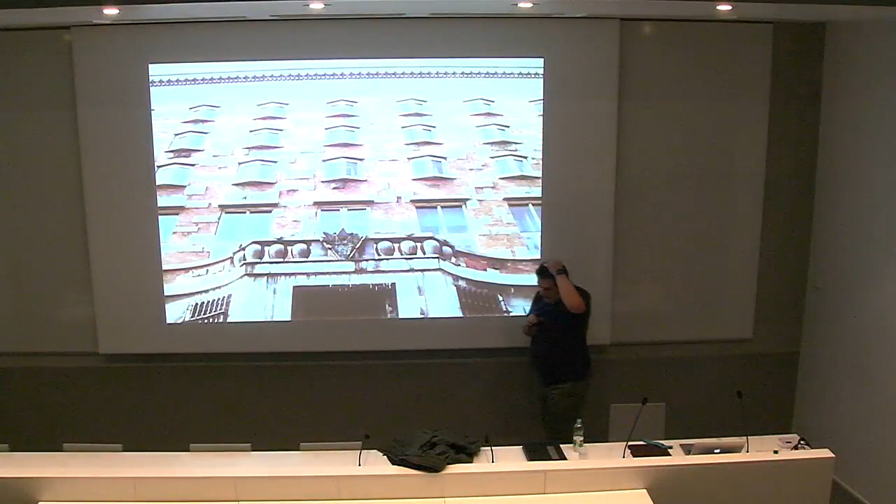What is specific to Slovenia is this one person, one architect embedded in the idea of Slovene culture—something maybe unique in Europe. The only other country being maybe Finland, because Alvar Aalto is very similar; he is part of the cultural physiognomy of Finland, if you want. This is Jože Plečnik. He was a student of Otto Wagner in Vienna and then went to work in Prague.

He did the Hradčany Castle renovation for the Czech president Masaryk, and then came back to Ljubljana and basically created the city that you see today, transforming it from a medieval provincial town into the spectacular little city along the river you see now. He did a lot of urban replanning, but this is also one of his most famous buildings: the National and University Library of Ljubljana, to which we are now doing an extension. This is the most famous building of Slovenia, in a way.

What is so interesting about this guy is that this is not very old—the beginning of the 20th century, just before Corbusier starts doing things like Pessac. He is trying to merge the languages of Europe, from Northern Europe to Byzantine influences to Knossos from Greece, into one singular language. It might look odd to you as young architects that I'm showing this strange, archaic-looking building, but I think this ability to understand and digest all these different cultures into one is fascinating, even though our buildings don't look like this.

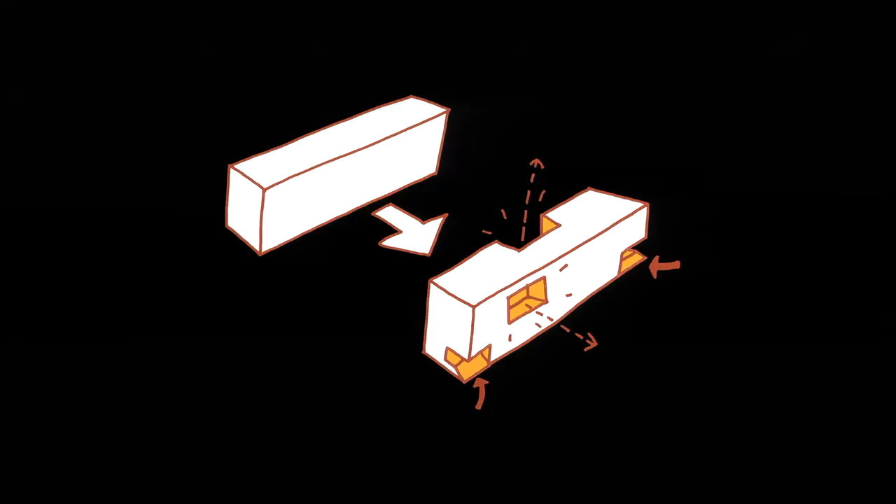Why do I show this project, which is already quite old? All the spaces are built into the building. You see it over there, open air, and over here. Already in those blocks, which were very modest in means and built for extremely small amounts of money, we were trying to express the possibility of an individual habitation within a collective form. This was incredibly important, especially for social housing within these massive blocks, to have the possibility of recognizing your own unit.

We did it also in other projects. This is something that some of you have visited, so I show it very shortly. I don't know, Dominic has seen it. This is student housing that we did for the University of Ljubljana, for the school where I teach, but not for students of architecture. It can be for everybody.

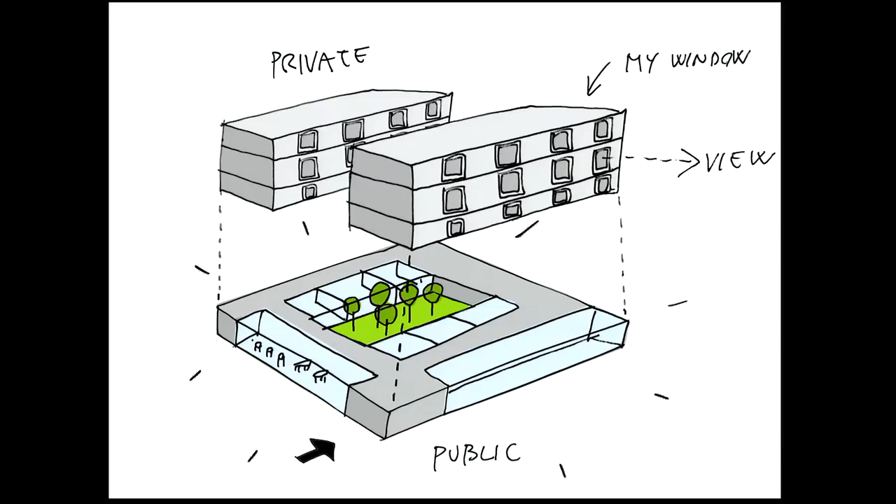It was a bit of an anomalous project, because it was the left-wing government going out and wanting the votes of the students. So we won the competition. We had to build it extremely quickly, and had to simplify the project to a point where we separated it into two pieces: a plateau of public programs, and slabs on top with the student rooms, where we tried to convince the university that student housing is somebody's home for 4 or 5 years of their life.

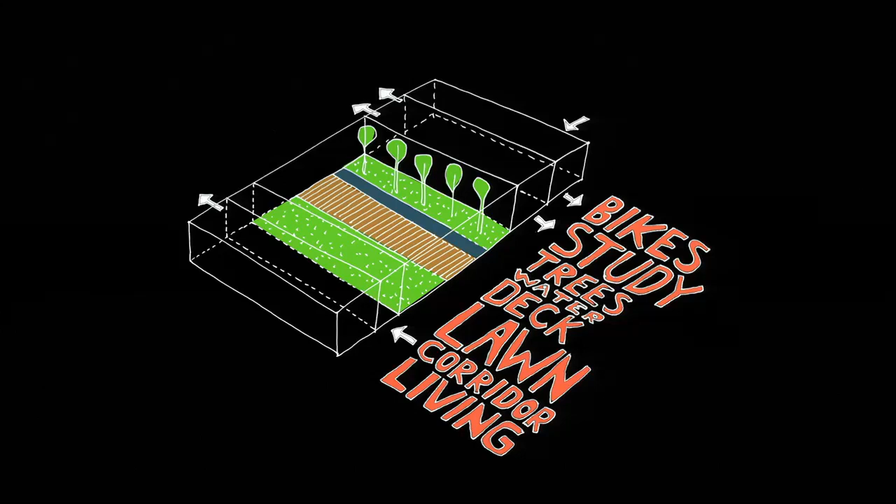So it's not really a room that you inhabit, but a kind of someone's home which consists of this very large public space on the ground floor, where there are all glass walls that don't separate the programs by hierarchy, because the bicycles are exactly next to the study spaces, only separated by glass facade. So it's a kind of big public area.

And then we also tried to convince the client, as a second thing, that the 4 slabs of apartments should all be the same. There are no apartments for invalids, no apartments for families with 2 children, no apartments for single people. This should be only one apartment type which can work in all of these options, because there should be a kind of open model of habitation.

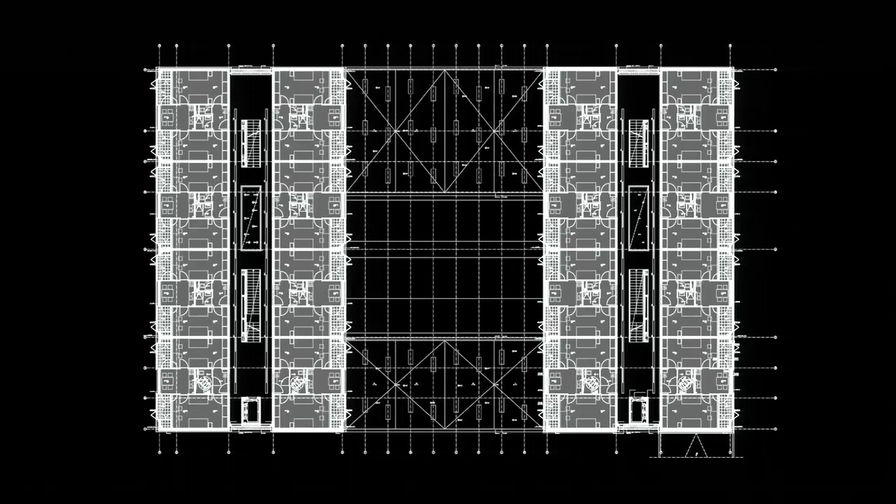For example, this drawing shows that each of these units, which is 1 room or 2 room with prefab bathroom, kitchen in the middle, and a dining room that they share, no corridors, is shown here in a 4-person configuration, but it exists in all the other configurations I just mentioned. So it's one singular unit fit for everybody.

Of course, it helped with the production, because we had to build this in a super short amount of time. It also helped us with articulation. Each of these units only has 1 window that you see on the street, and this is the public face of the unit. This is what you recognize as your home for 5 years studying at the university, and the rest is private terraces which are screened by folding screens.

The fact that this is the center of the unit - I have much more explicit photographs of this, because these were sent by my students who were taking pictures - also shows, in fact, what we tried to do. We tried to express this minimum of individuality of the unit on the facade of the building itself, while preserving a lot of the spaces for the private parts of the unit.

We also worked on projects like this. This looks like Berlin in 1980, but it's in fact Ljubljana in 1980. We inherited an old urban plan, which, when we went to visit it, is also social housing. Social housing, as you know, is super regulated - you have to have an enormous amount of children to qualify, and you have to be unemployed, and so on. So basically these units are very small.

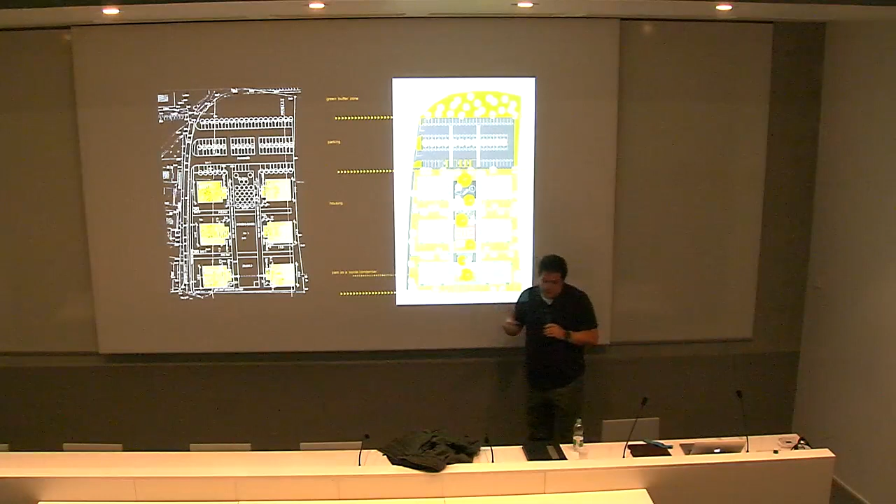We were supposed to work with this fixed urban plan, so the whole project becomes a transformation of the urban plan, in fact a fight against it. When we went to see the site, we were shocked to see these are the first 6 buildings of the city of Ljubljana. If you come by train from Zagreb, this is the first image of Ljubljana you see - it looks very urban, but in fact it's total suburbia. So these 6 buildings became like sentinels that guard the city of Ljubljana.

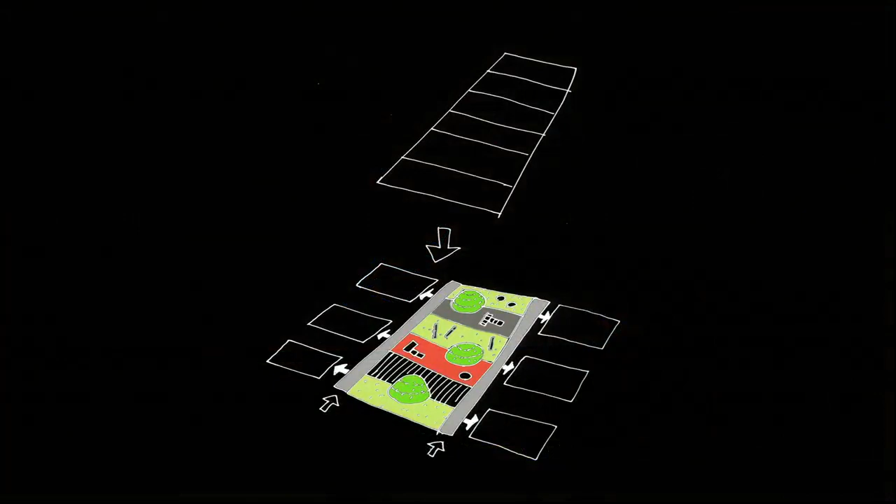Around the central area, which is the common living room, where all the people basically chuck out their children from the apartments, the articulation of this space becomes extremely important. It's not really a landscape—we never saw it as a landscape.

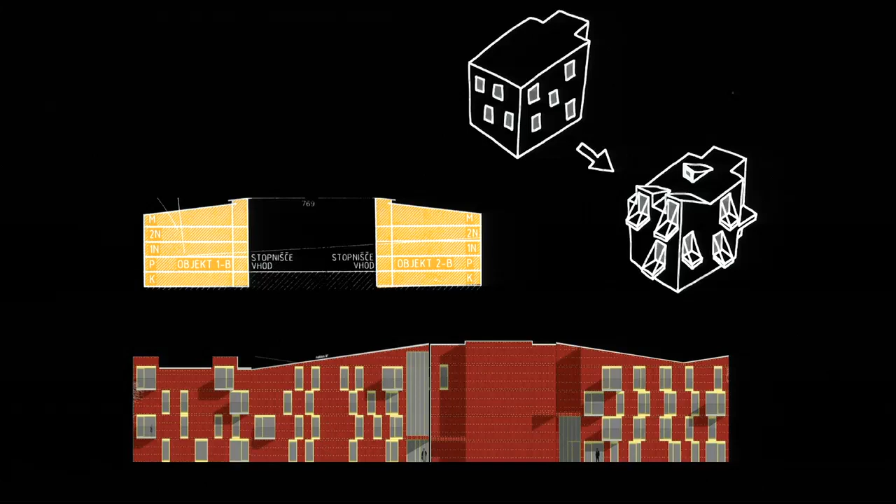We saw it as a kind of plateau where all of the generations can overlap, using green elements more like building blocks that separate the teenager playground from the small kids. Then the idea was to transform the houses from what the urban plan said—a very formal expression—into something that appears different from all sides, so every time you look at the building it has a different kind of appearance.

And pushing out the balconies, because these units are so small that the balcony takes the form of a kind of suspended garden. The image you see of the buildings—everybody asks us about this, and everybody is actually horrified. People don't like these buildings.

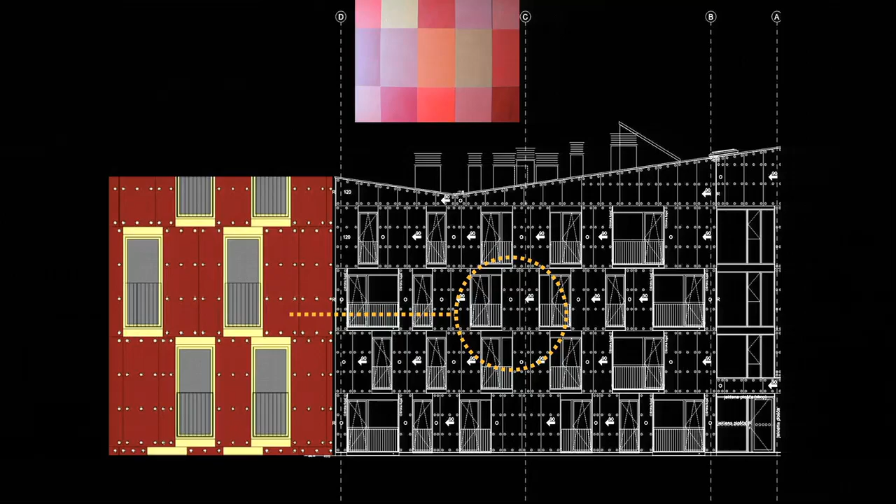This comes from the fact that we use the productive size of the panel to cover the facades, always cutting the last panel. And because architects always try to make things perfect—ideally you'd make this into a wonderful panel where you wouldn't see anything—we actually enlarged the screws, so what you see, these white dots, are in fact the underlayers of the screws, visible from 5 kilometers away.

So the first thing you see about these buildings is this strange form that denies being a house, and also this enormous amount of dots that show the most minuscule element of the building—that's the first thing you see.

This is that housing, and afterwards we won a project for the second part of that housing, where we tried again to experiment with construction. We actually think the relation between the unit and construction is extremely important. Here we constructed the buildings out of concrete, like shelves, without insulation.

Then we inserted wooden constructions into the building—so basically what you see here are the wooden constructions, built like small sheds in the garden, inserted into very large concrete structures. So the building is a kind of shelf full of individual apartments, meaning each apartment is also physically insulated from the next door apartment. In a sense there's this feeling, at least for us as architects, of individuality of the unit.

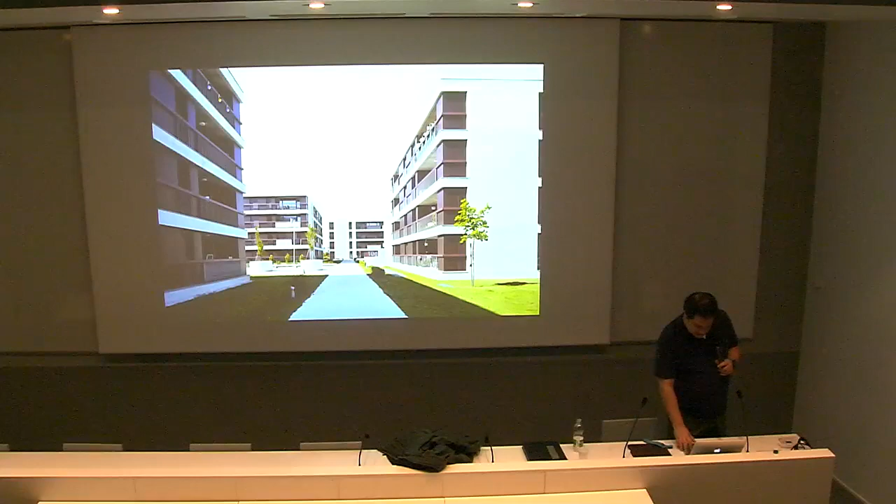Then last year we won the in-between space, so we became our own context—we are building in between two of our projects. We did a kind of joke, a typology that is in between the two, one in between the city block and the villa block we had before.

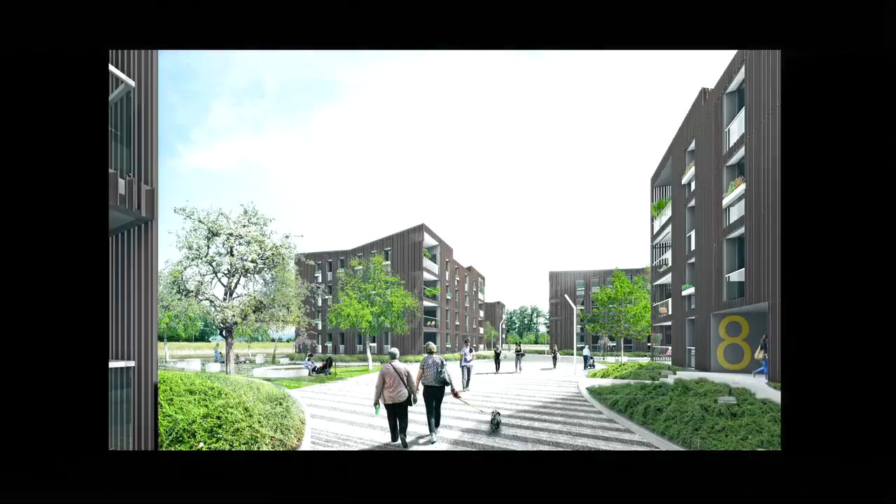It's actually under construction now—it looks like it's in between the two, and it's exactly 50% of the color of one and the other that come together. So it's literally a merger of our two projects, but done in something that looks like wood, though it's in fact a kind of extruded aluminum facade we are just doing now.

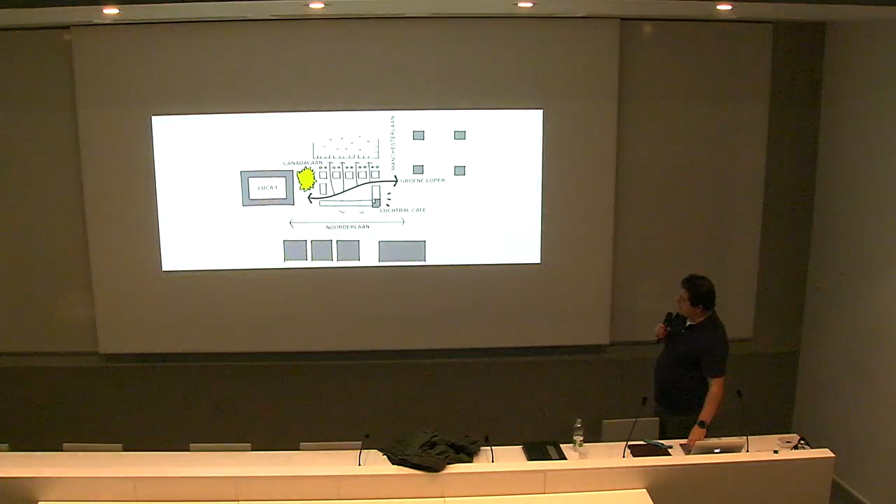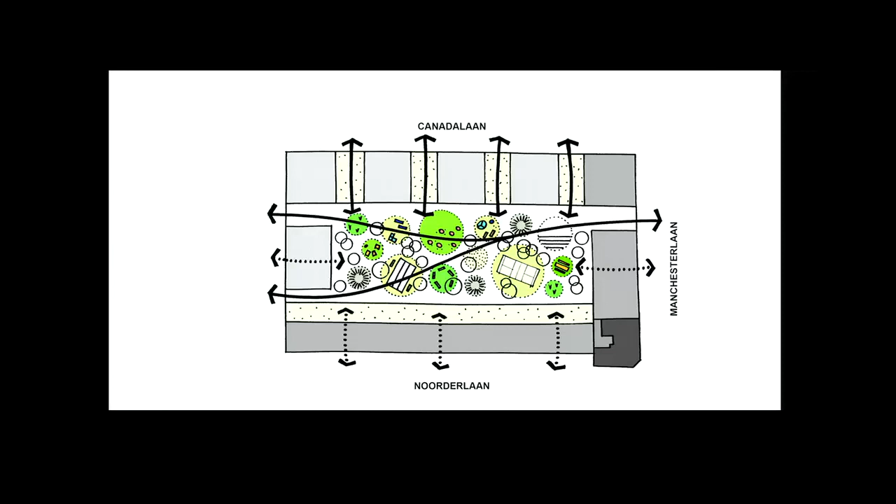As Dominic said, we have an office in Antwerp, and we are doing a transformation of a city block where only one building remains, in the port of Antwerp, also for social housing. Following the idea of the robust structures of the buildings in the port, we create a structure that can be filled in with maybe 50 different typologies of apartments, giving one singular image towards the outside—so it's a kind of urban transformation.

So why do I show you this collective housing? We don't do only social housing—if you go to our website you will see quite a lot of it, but we also did some commercial housing as well.

This is one of the commercial housing projects that, in our opinion, summarizes very well the relations we always try to capture between the program, the relation to the city, the structure, and the feeling of individuality within the collective form.

We were supposed to demolish that building. What we propose is to create something that fits perfectly with the urban designers' rules. It touches all the edges the city requires us to touch, but is in fact lifted in the air. We joked that it tries to bring the frivolity of Brazil into a Swiss condition.

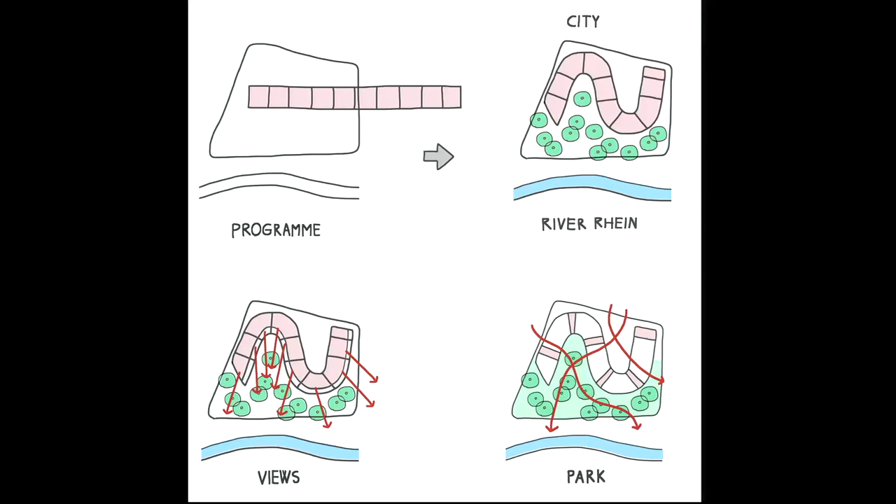Of course, the young people need more bedrooms, so their apartments are stretched in this way, so they have more bedrooms and can have children. The old people want lavish living rooms, which cost 1 million Swiss francs, and have very little bedroom space. So in a sense, a form that works at the same time as a programmatic distribution.

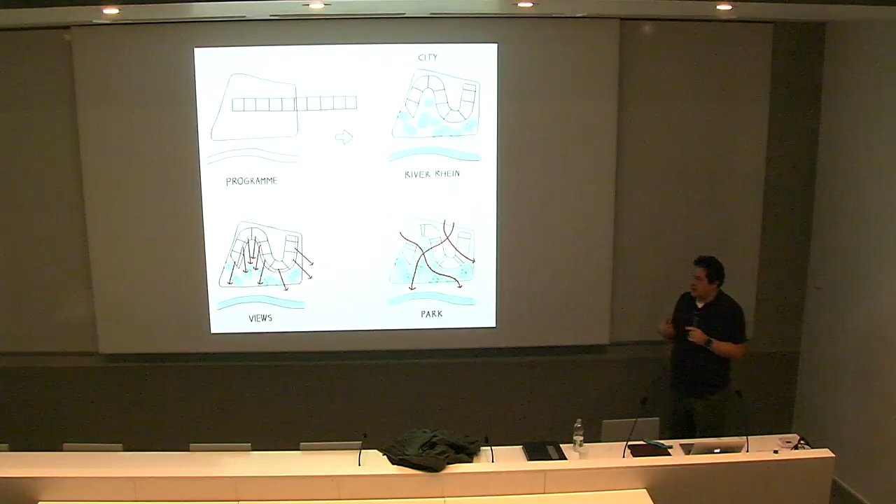It looks very frivolous, but in a sense it has a logic. It's lifted up in the air on these 4 columns, 6 columns in fact, open underneath.

It looks something like this: continuous terraces that surround the building on all sides, at different widths. If you look at it from the Rhine, it comes out twice along the river, creating dynamics that already exist there—it doesn't make a city block along the river.

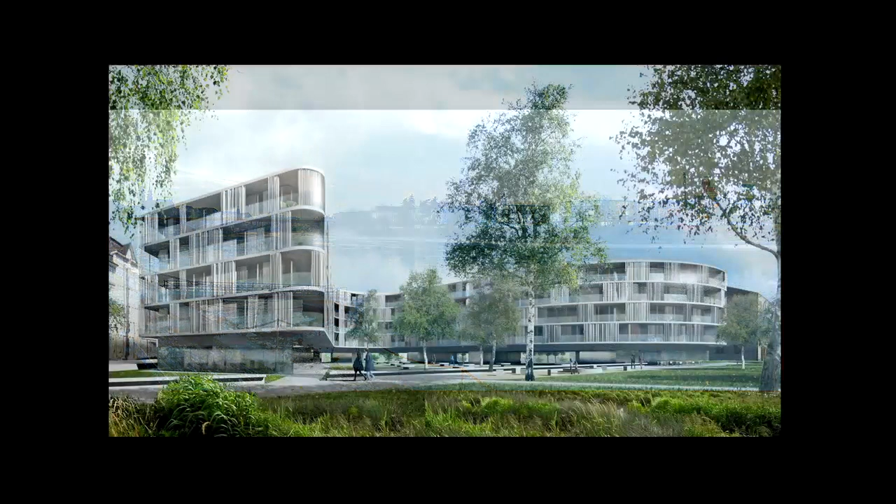If you look at it from the ground floor, you have this continuous ground floor which goes completely underneath the building, and then these kind of metallic terraces that block the views of the private units. How does it really work?

It's a singular structural system. These are the columns, the cores. There's another concrete beam, and a series of thin steel columns which support the facade and also create this one singular beam that curves around and creates the building itself.

So this is the columns, this is the ground floor, and then the building floating above it, and these old trees which are preserved and basically extend all the way underneath the building.

As I said, old people have less bedrooms and a lot of living room space, younger families have it a different way, but everybody has the view of the water.

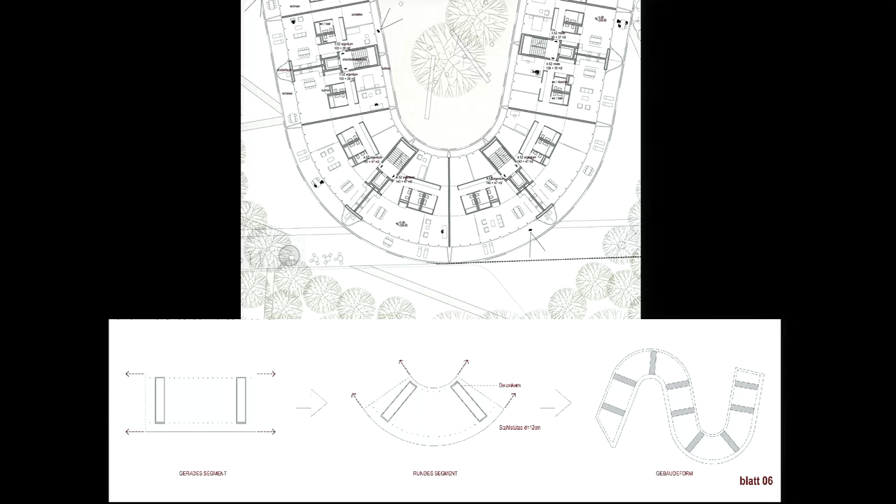So in that sense, the structural model and the way things work—maybe this is why I wanted to show this project, because it illustrates very well how all of the elements of the building should work together.

The glass facade of the building is also curving in and out, and on this part it becomes mirrored. It also separates private terraces, but also serves as storage for each individual unit.

So in a sense, even the units that are completely at the back will have this kind of fantastic view of the river.

Of course, this means we don't only work on super cheap housing. This housing is unbelievably expensive, but the thought process, I think, is not so different. It's maybe the amount of money you can spend that changes, but the way you construct it is not different.

We have also done, more as a sport of the office, a lot of small houses, as Dominic was mentioning in the beginning, and we use them more as test grounds for different ideas that might appear in other projects.

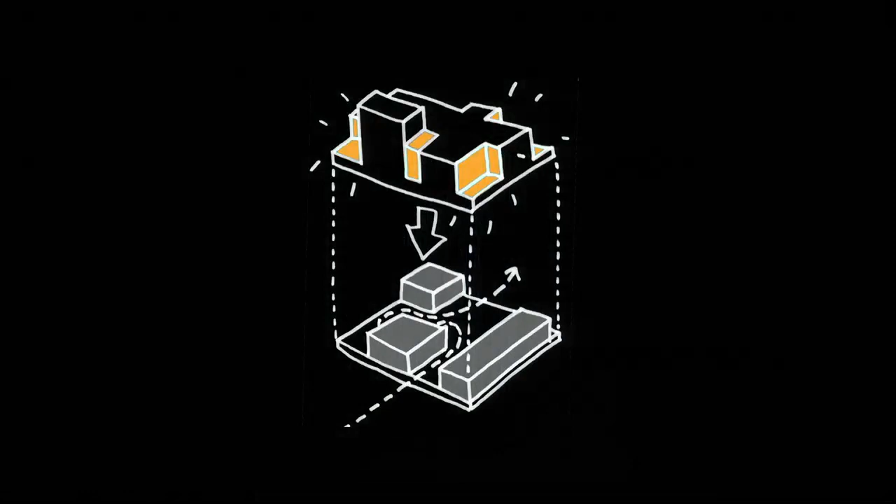One of the first houses that we did, apart from the SB house that Dominic was mentioning, was a residence for a Dutch ambassador in Ljubljana, which was a very prestigious commission, but not a very big one. The building is organized around the fact that embassy residences have a public part, which the ambassador uses for parties, but also a private apartment for the family. This duality that the house has to function on both levels is something we used to construct the building.

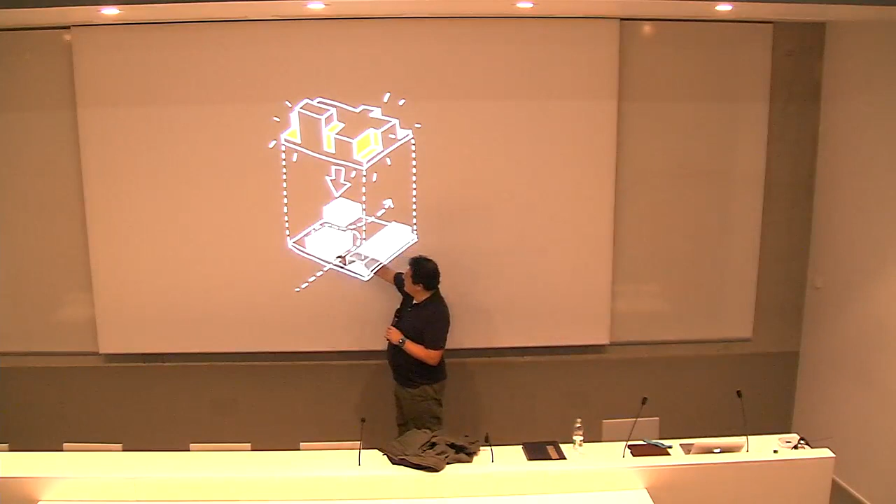This is the kitchen, toilets, and this kind of stuff. This is the office of the ambassador, and this is the small salon, the cigar room. These three programs are three concrete volumes that support the wooden construction above, which is the actual private house of the ambassador. So the house looks like this on the outside, but it's a combination of two structural systems that come together to unify and describe the program of the building.

We have also done a lot of small interventions, like this funny little pavilion, which is like a rock thrown into a garden, actually made like a rock because it's hand-polished white concrete. This is also a good thing about Slovenia, is that you can still find laborers who work very cheaply, so we could have people sanding the building for two months by hand.

But this is one of those constructions which is not really a house. For us, it's more like a device, more like a camera. If you look at it from the interior, it's more a device to enjoy the garden. So we never really saw this project as a house, but more as a kind of play with the space of the house to frame the garden.

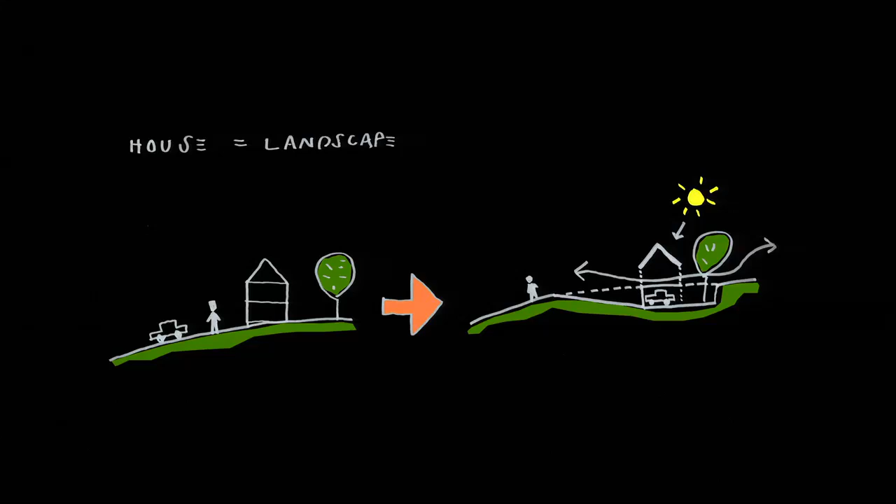The dialogue that houses always have with the landscape is also an important thing, and maybe this project illustrates a possibility to subvert and include the landscape. This is a very young family, and we convinced them—they have a house on top of a hill—to dig the hill, making a huge earthwork to hide 50% of the program into a kind of patio condition, and then to have only this tent dominating the landscape.

So the house, in a way, is like a little steel tent. Well, not so little; it's 25 meters long, but it basically sits in the landscape. It has the traditional form because this is required by the local authorities. But also the idea that the house has to have this form, then even the two construction models: the patio house, which is hidden and all in concrete, and then a little steel house on top.

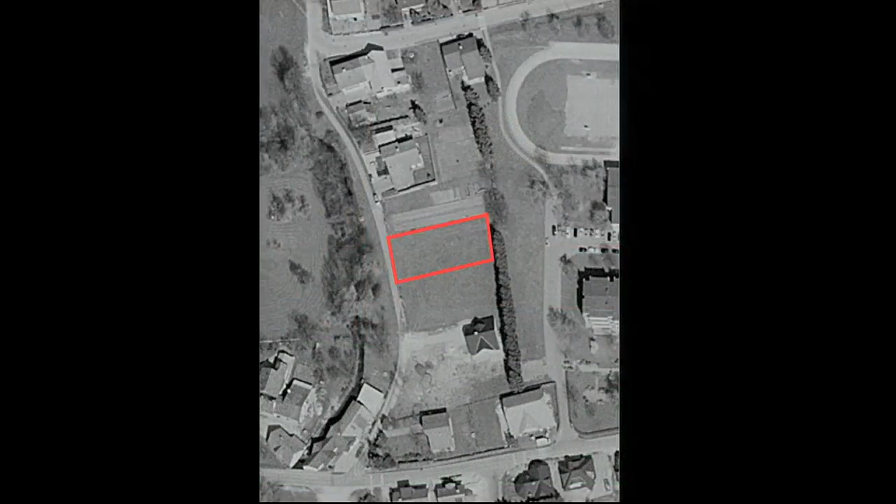Sometimes when you work on projects, you have nothing to work with. This is one of these examples. You come to a location and there is nothing there. No, there is nothing, you can't say anything about it. It's just a piece of ground, a piece of earth without any references. So this is Ljubljana, Slovenia, one of these sprawls where we were supposed to build a house for a family with four children.

And maybe these four children become the theme of the house. This is a couple that got four kids after being together for 20 years. And of course, it's the miracle of science, not a miracle of... well, the Pope was visiting Strasbourg today, but he didn't help in this case.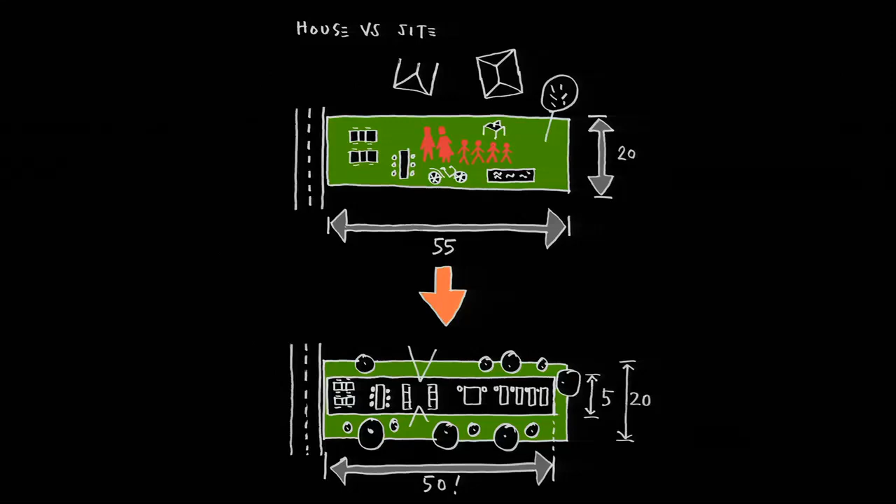So maybe this becomes the project, the actual context of this house. We create a house where these two people can live with their four little daughters together, but also separately at some point. So we imagine a non-place, like the habitable supermarkets of Andrea Branzi from the 1960s or 70s, as a place where you could enjoy living with your family.

Of course, the neighbors accused us of doing a gas station, and then a car showroom. But in fact, it's a single building, 50 meters long, where there are no rooms. It's basically one room with four little boxes, one for each daughter to separate, and then a series of walls that come out. When the daughters become teenagers and want to be separate, this will allow them to separate their rooms. But for now, the mother can actually live with her four kids the whole day.

The weekend house typology is a very stupid one, because it's some sort of total waste of space. These are buildings that are occupied for 48 hours a week, at best, so they're basically piles of building material standing around.

So we did this one in a kind of protected area in a national park, to replace an old structure that existed here. We made a building that would look more like an object thrown into the landscape, which only on Friday evening would become a house.

On Friday evening it could explode and become a building, serving the purpose of a house for two days. It would also include all the outside spaces. We try not to really touch the ground, so all the outside spaces of the house are included, because on Sunday evening when you leave, the landscape would remain unspoiled.

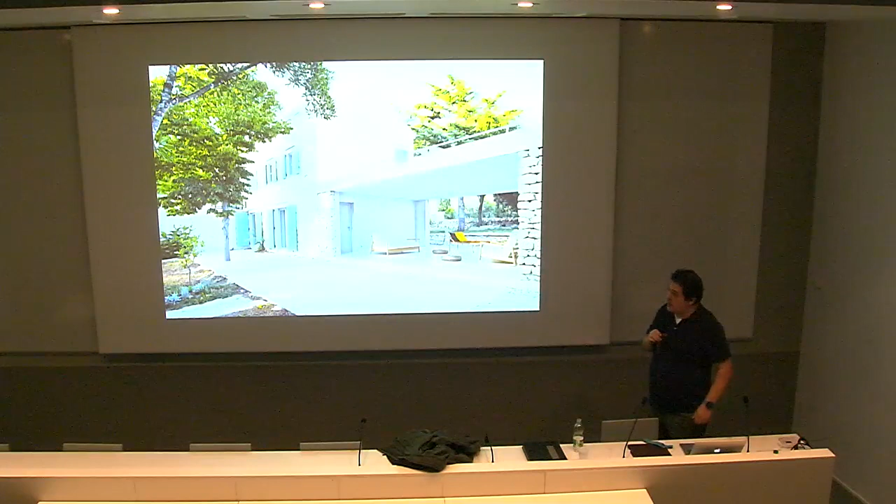Here the complete construction is in white concrete, again hand polished. Then we place drywall against this construction, like the kind used for separating walls, because these houses were built solid out of stone, and the walls around them are this kind of drywall. We actually combine two models of construction, one for the ephemeral, together with the one for the real building.

So the old building we renovated, and this new one, the kind of open-air living space, we constructed with some spaces. This is where I sleep when I visit in the summer. This is a guest bedroom, but it also has a facade which completely slides away, so you can actually sleep completely outside. So, the stupidity of an architect...

This is what we thought was going to be the fantastic area to sunbathe in summer. It's actually 60 degrees here, so nobody ever sat on this fantastic terrace that we designed. As architects, we are also very, very stubborn, but also very, very stupid, very often.

Sometimes houses exist in kind of imaginary pairs. This is a house which has its pair. We had to demolish half of a double house and build it again, but it became a kind of ghost, a white ghost.

At the same time, we had to do exactly the same thing in Ljubljana. This was Zagreb, this is Ljubljana, two cities 150 kilometers apart. We create a kind of artificial dialogue in the office between these two buildings, the double house that we demolished, again made out of steel, in dialogue with the neighbor but also with the other house, 150 kilometers away. So we are the link for the project.

For a young family in Prague, we are just finishing this house. Prague suburbia, there's nothing, again one of those no-places. A teacher of mine used to say, when you go there, there's no there. So it's kind of nothing, you know.

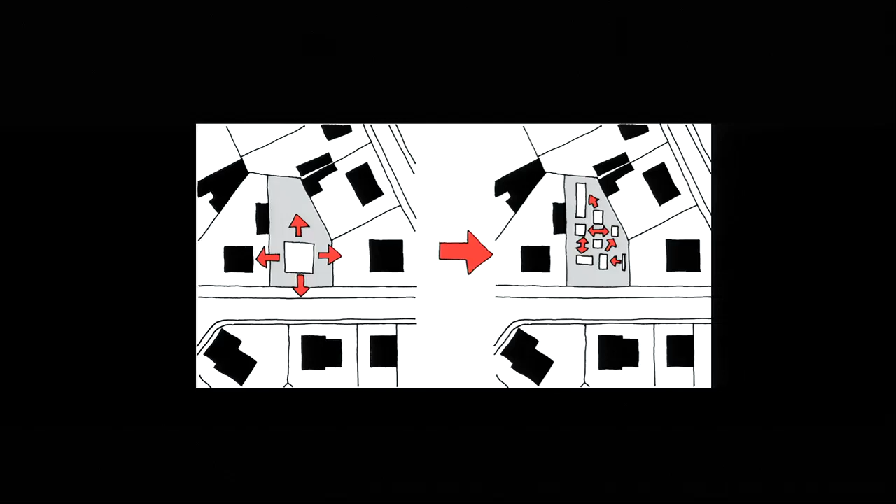Basically, the house has to create its own urban conditions, so the house becomes a small village. Every space of the house, for a very young family with zero money, is in fact a separate little house. We tried to create it so all of these spaces can be constructed by themselves, because the budget is so low. It's a simple wooden construction where we more or less instructed them how to build it. A Belgian guy in our office worked with them and explained it, and now they're basically weekend builders with all of their family and friends, finishing the house.

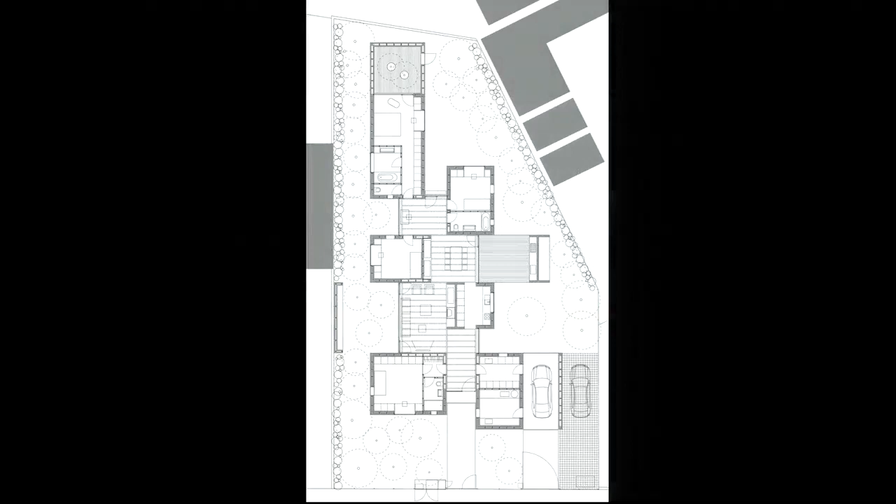The house is then something like this. The living room is the only one, about 160 square meters. It's also the main circulation of the house, and all the other rooms are just separate little boxes. The boxes are connected by the same construction, and the living room is the one that remains in natural wood, while all the other wood is this pre-patinated gray wood.

So that's a quick overview, but I'll also show one project in the city of Ljubljana that we designed for friends of ours who asked us to demolish their house. It's a very expensive neighborhood, even though it doesn't look like it, because all of the embassies have moved here. We demolished this house a few years back. These were friends of ours who asked us to design what they called a small house. They have no children, so they said: one bedroom, one living room.

We said, fantastic, finally somebody who doesn't have huge ambitions. But then next time they told us, yes, but we want a swimming pool, and we want a gym, and we want a music room, and we want this and that. So finally it became a huge house. So the question became: how do you make a huge house feel small?

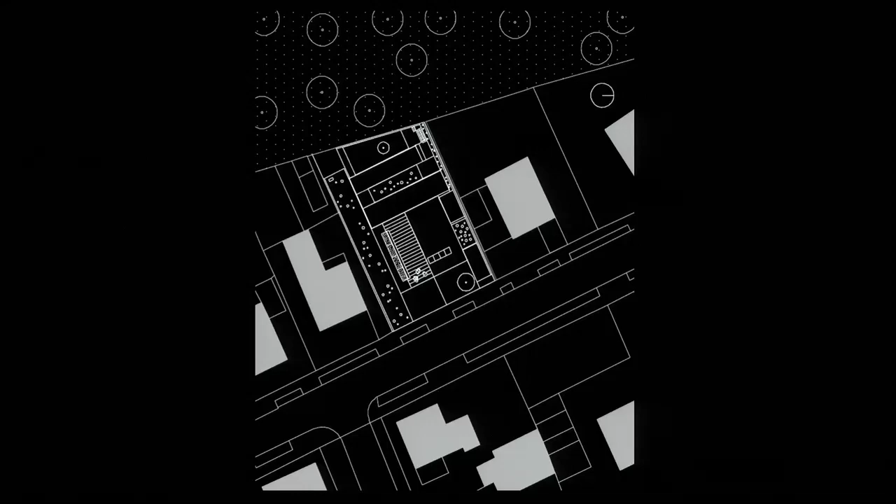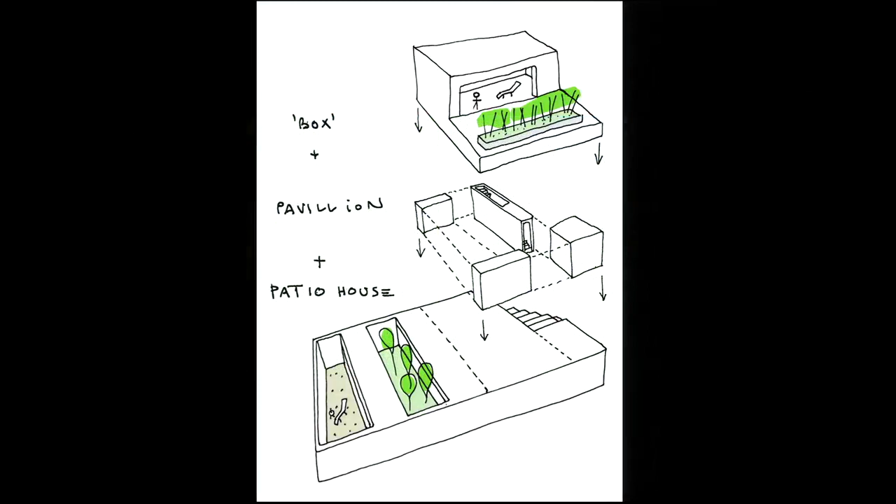What this location has next to it is a kind of very large natural biotope, protected by the city because of some parasites that live there. So we said, okay, maybe this can be their garden, because obviously the program is going to completely fill the site. So this is their garden, this is what they look at, not what they actually walk in. The house basically covers the entire plot with some patios in it, and we have two different typologies standing one on top of the other.

If you look at the plan of the building, it actually looks like some sort of landscape configuration. If you come to this street, the building has no fences, because all of this greenery is its fence. It has this very special configuration. It's constructed completely out of concrete, like out of concrete, rough concrete. It looks very perfect in this picture, but it's relatively simple concrete, not specially finished. It's turned inside out, like a glove.

There's apparently no communication towards the street, because this is the only light you actually see when it's on. It's a bit of a Plečnik motif, because he always has this motif of entering the building as a very important part of the building itself. Once you enter, you actually see the garden — you don't see the living room, but you see across and you see the garden.

I'm not going to go into the structural model of the building, but it's actually standing on very few elements. Then you go out towards the terrace. The good thing about old buildings is that you have these super thick walls, which we cannot make anymore, so you get this transition space — when you go out, you have a distance to walk before you're actually outside. Today's buildings don't have that thickness, so we wanted the same feeling here, and we created these very deep wooden windows where you can actually jump out of the building.

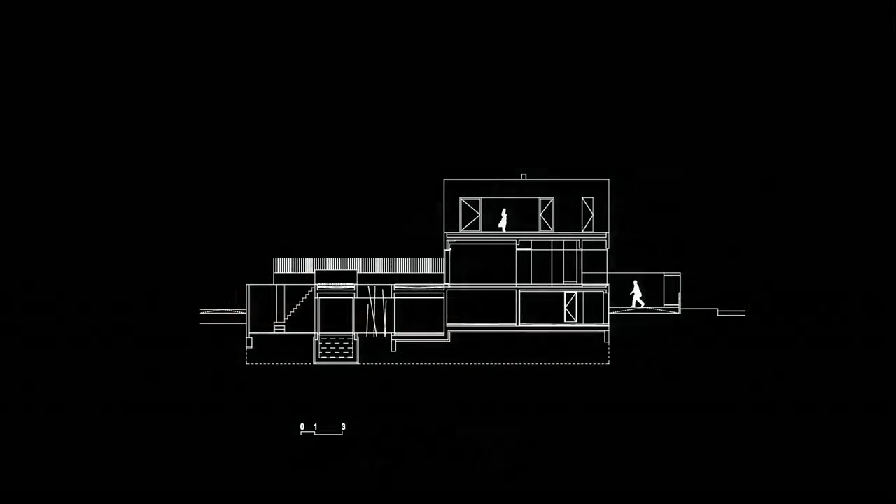So this was somehow the idea that the building should be so unique, so unitary, so just one construction. This is the complete section through the building, where you see the basement, which is completely filled with programs.

So you go to the basement, this is the first patio, which we call the beach. The second space is the swimming pool in between two sheets of glass which slide down, so you can swim in the summer. Then you have the workspace and a kind of gym space, and a series of other spaces in the building.

On top, just a box with the bedroom, which is oriented towards the east, so it catches the eastern sun. Once you go out of your bedroom, you are again faced with the garden. So this is in fact the garden. Well, this is not what they own, but this is what they have as a garden.

So as I said, this transition point, this ability - well, this is a good thing about small houses. They give you this ability to rethink particular elements of the building, and maybe allow you to try things that you can never try with larger projects.

Finally, I would like to show this image as our idea of the collective. This is a wallpaper again in my house. So you look at it and it looks like this - a fuzzy pink, pinkish surface.

If you come very near, it's actually 4 millimeter wide faces of, well, maybe 35,000 Korean people who are all schoolmates of, or the generation of, this Korean artist who painted it. So what you see as a kind of fuzzy cloud in fact consists of very particular human faces. Sometimes as architects we have to play between these two scales - the collective that you don't see, consisting of millions of very individual human beings with very specific wishes, and some of our buildings also work on that level.

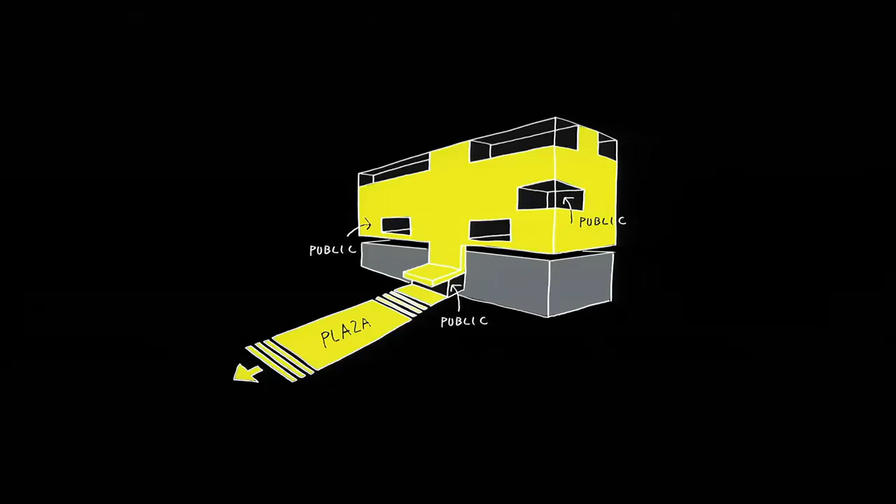This is the first of the public buildings I'm going to flip through, the School of Mathematics, which we had to build some years ago on top of another building, not owned by the university at all. So we basically had to build a public building on top of an already existing one. What we did is try to create all of these spaces, the aulas of the school and so on, to have a very direct communication with the city.

And these are these open windows. All the rest is completely hidden in a kind of screen of fuzzy programs. All of these prints are different on the glass, and they're all on the exterior. So, in a way, each of these prints is defined by the amount of light that each of the rooms behind can take in.

We did this project for the University of Antwerp, the central building for all the lecture halls in a very green campus, where we tried to include the series of old trees that existed on our site as a facade of the building.

So of course the main building has to be a circle, but we don't have enough program for a circle, so it's a square with a kind of slice of a watermelon. And the slice of watermelon is a lecture hall. The building also looks like a slice of watermelon because it is literally sliced, so you see the section of the building coming out towards the square.

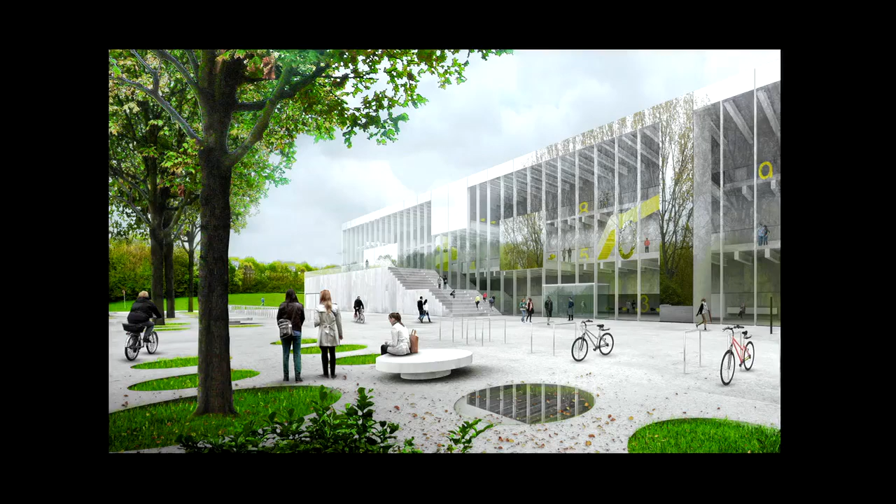And this section of the building is very industrial, very rough. It just connects all the classroom spaces into one, while on the back it is really literally closed, and all of these balconies are in fact escape routes or the smoking areas of the school.

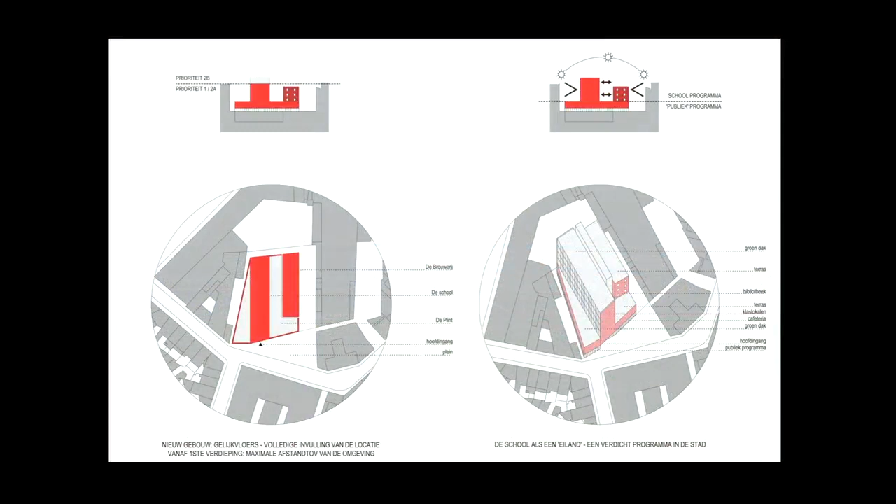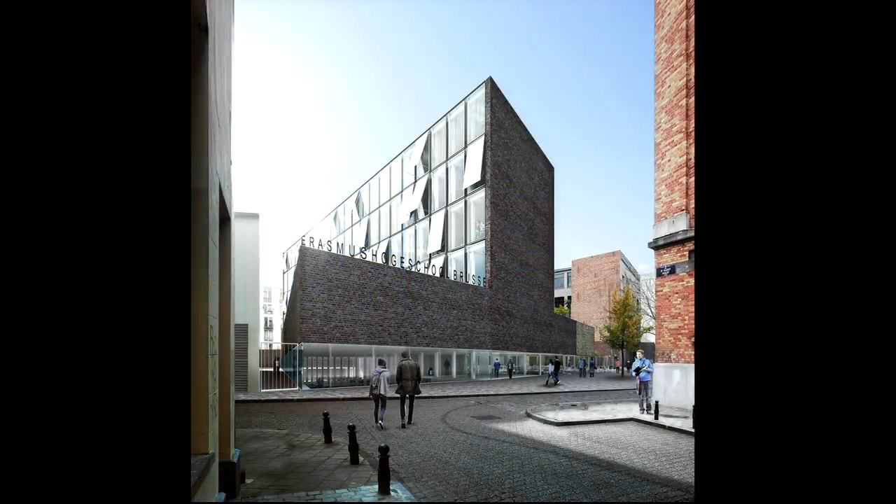So this complete neighborhood, which is very dense, a very mixed neighborhood now being gentrified, but where a lot of Moroccan families still live, will somehow become part of the ground floor of the school. This is not our project - this is Martin Creed, a British artist who is working on the public art for the school.

And of course, the complete compression of the buildings inside this neighborhood, with also the open spaces of the school included in the volume of the school, etc. You will have to see it.

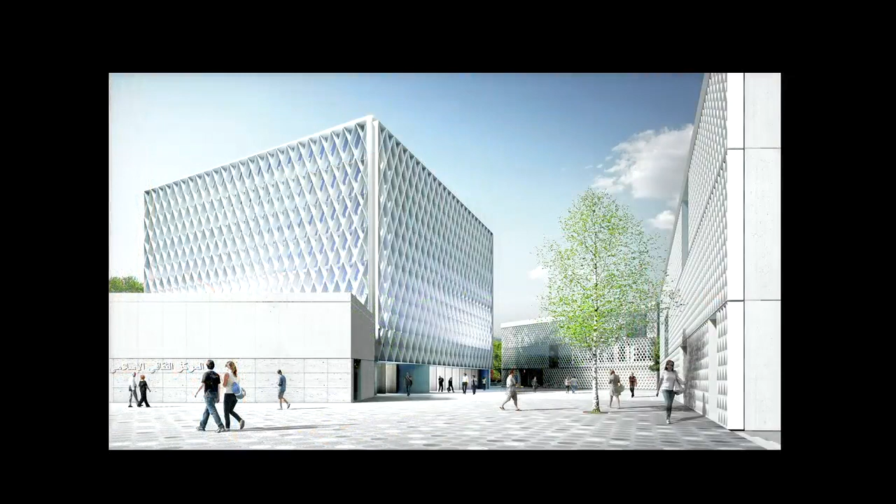We are now also constructing the first and only mosque in Slovenia, in Ljubljana. It's a completely Islamic center which we are just now building. For us, the idea of a mosque was that this is a completely exterior construction. I'm not going to tell you very much because you're going to see it pretty soon, and it looks better in reality, but this was our inspiration.

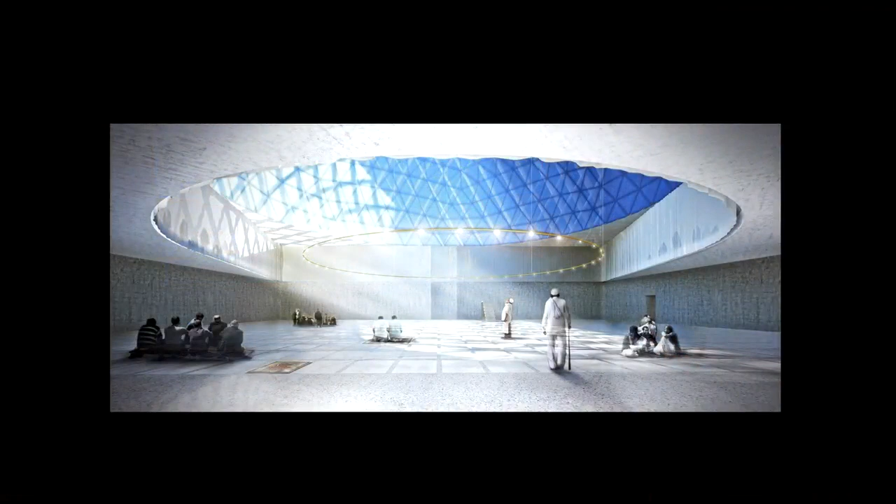We tried to explain to the clients that religion is something completely weightless, and it shouldn't really be a building. So the symbol of the religion is this 15th century Persian miniature, the Iranian soldiers going across the Asian territories with tents as mosques. Because the Islamic community of Slovenia is of course also a migrant community, we didn't see them as warriors, but as people who actually carry their religion with themselves and that doesn't have so much material.

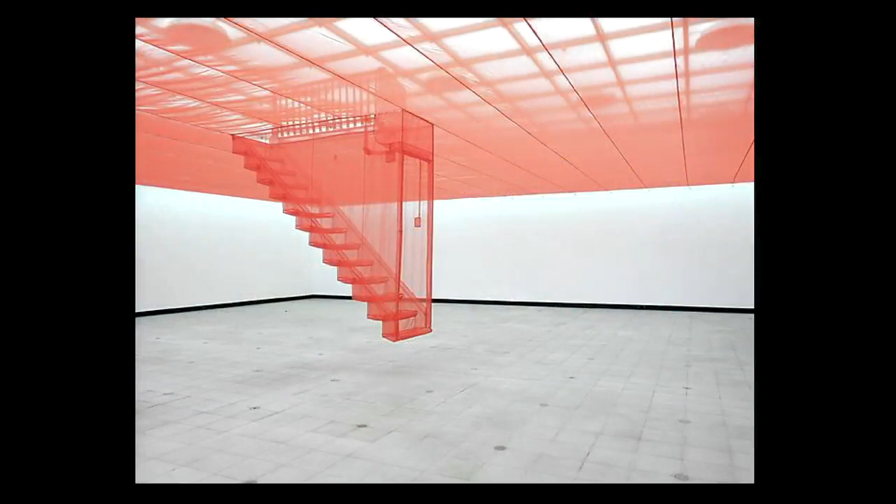So these public buildings, of course, have this ability to tell stories in a way.

Nothing happens out of nothing. We are always working with the things that existed before us and are going to exist after us. So he's kind of interpreting this, but of course adding his own specificities. The definition, the relation between the structure and the program in Plečnik's buildings is extremely important.

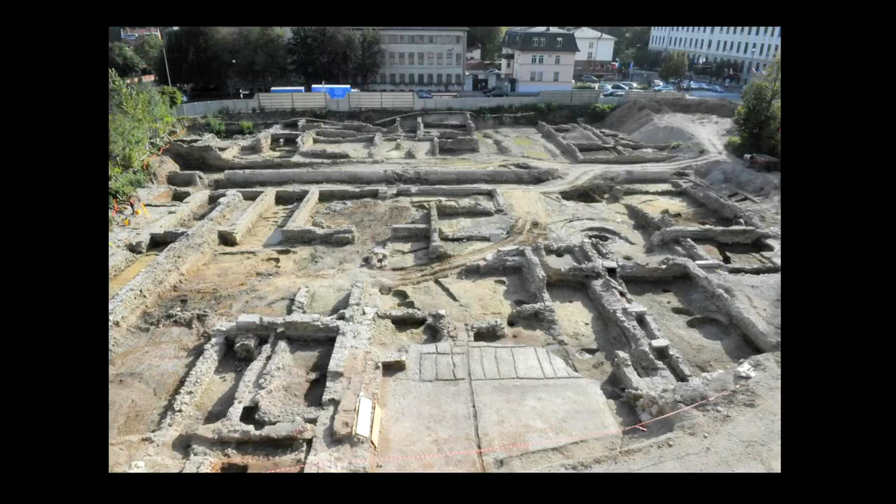The shitty thing about this project is that it sits on top of the Roman city. The problem was basically we were asked to design a museum for the Roman ruins, and then a building on top of it. So we said it's completely ridiculous.

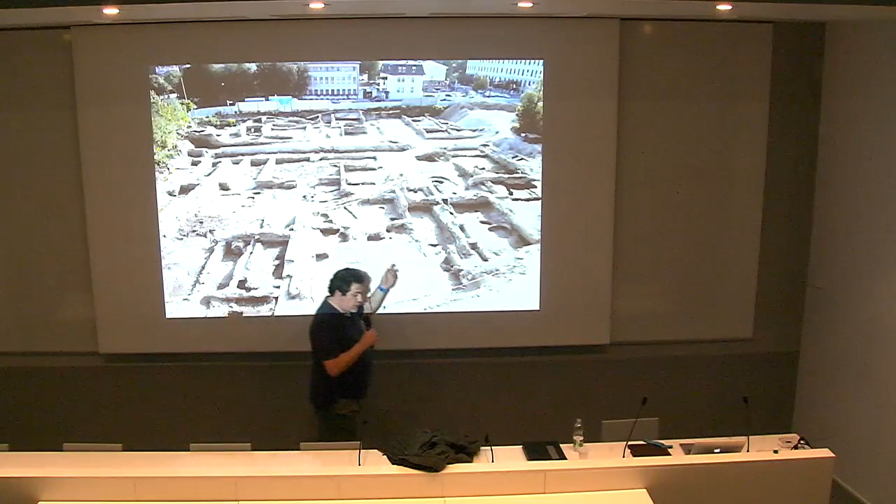These Roman ruins are, of course, valuable, they are Roman, but in themselves don't present such an incredible discovery. There is really nothing to see except for the kind of structure of the Roman city. So we were very interested in how you can basically use the history, and how you can work with this. This is the overlap of contemporary Ljubljana with the Roman city, and our building is somewhere over here, somewhere here.

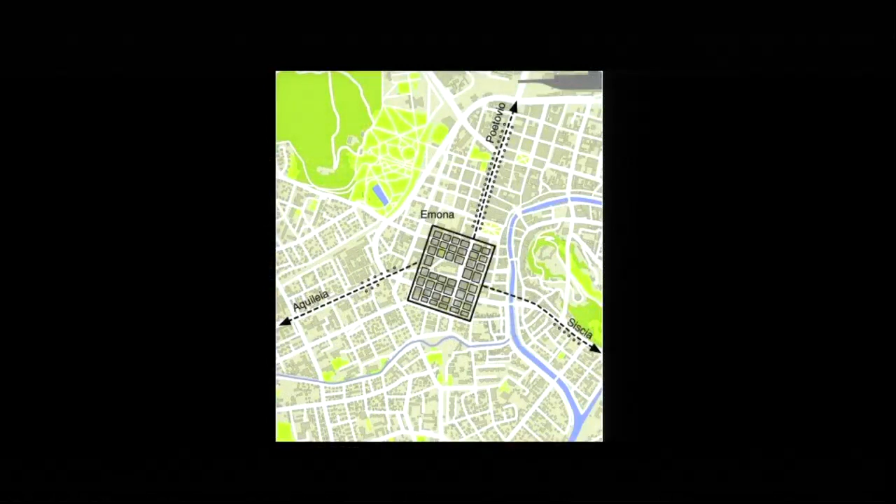But these are the university programs that actually make the city alive. So Slovenia, Ljubljana has this kind of confetti that doesn't have a campus. The whole city is a campus.

On this location, we decided to use, so you see how the two geometries collide. We decided to use the pink things that you somehow see on this image, which are the archaeological excavations, to basically define the spaces of the library. The main level of the library, all the reading rooms, all the daily reading rooms, are within the Roman ruins.

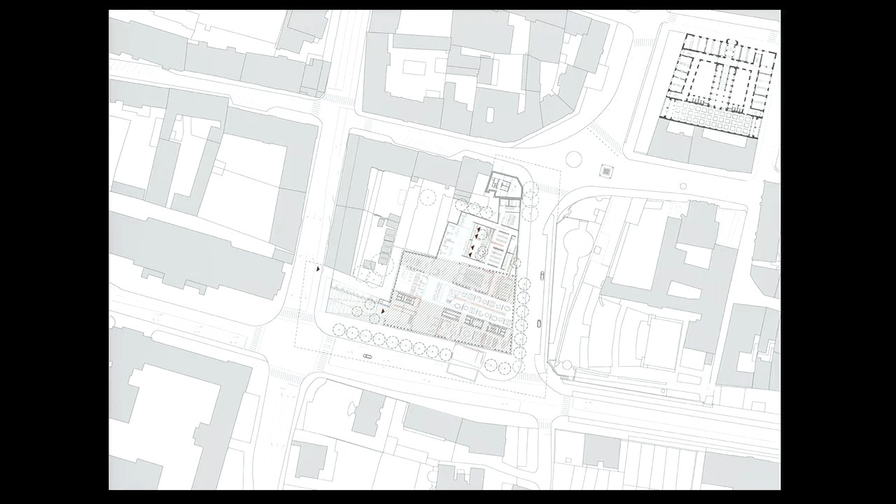We did a building that doesn't close the city block. We were supposed to demolish this 19th century building, but we said, how can you decide now that Roman history is very valuable and 19th century history is not valuable? So we preserved everything on the site. Every history has its meaning. If you try to start keeping one, then even the old Volkswagen becomes important.

So we did this building which would have two squares to enter, which would have this kind of model of circulation, which would look like this. Very carefully, these are the floor plans of the Roman houses, this is the cloaca, this is cardo and decumanus. Inside there, we looked for the programs that could fit into the old Roman city and filled them in. We created a building that is a collision between the geometry of the city today and the geometry of the Roman city.

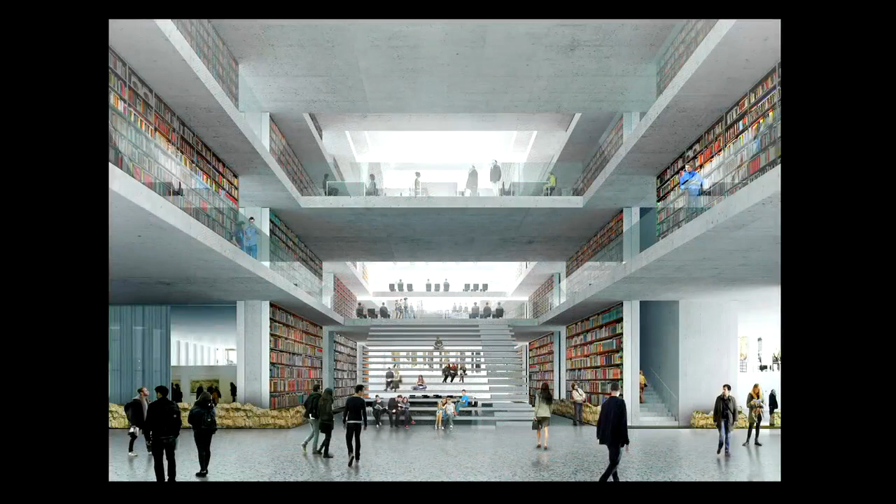Of course, within this space, we constructed, so you see this is completely defined by the Roman ruins. This is, of course, a perspective. And then on the upper floors, we keep this space as a big reading room.

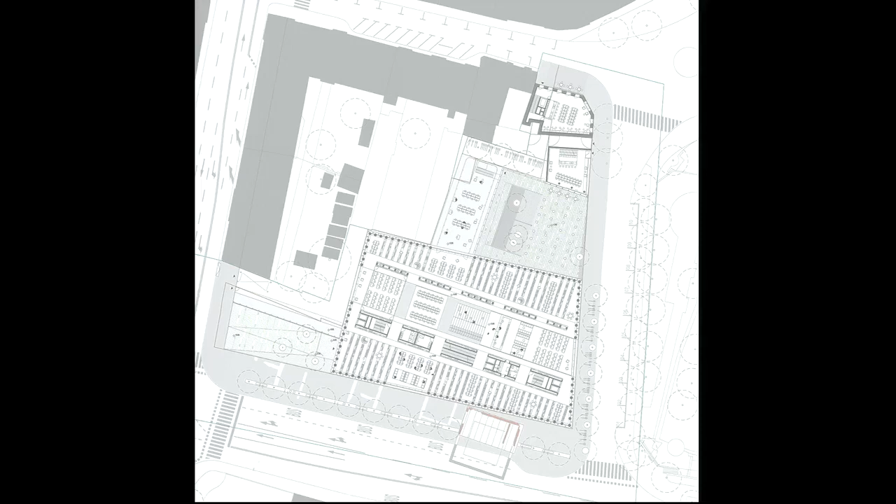What is the library today? It's stupid to think of a library anymore as a kind of space where you keep a few million books and people come and touch the books and pull them out of the shelf. For a university, it's a social platform. It's of course important to have the feeling of books, because this is why these buildings exist, but it's much more important to have the ability for maybe 1,000 or 2,000 students to come into one space and feel like it's a kind of living room of the university. This is, in fact, the only purpose now, because otherwise everybody can download a book, more or less, no?

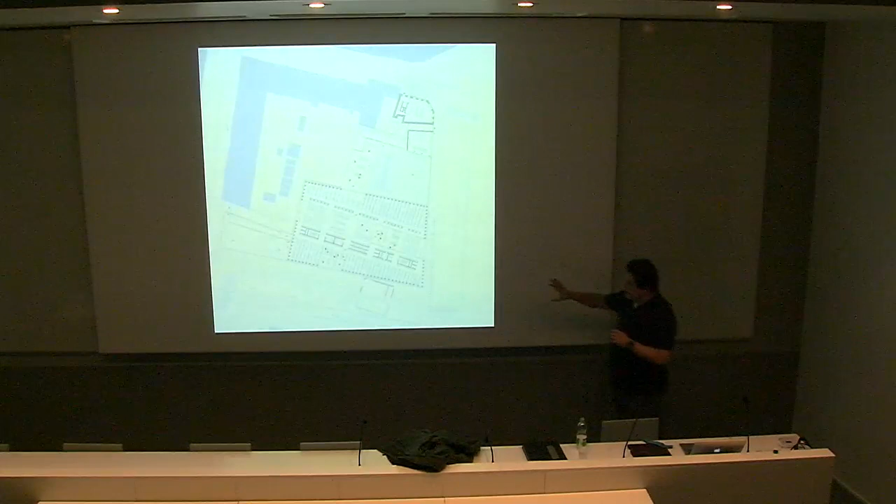So we have the library, and then we have this huge reading room, which by accident is exactly the same size as Plečnik's reading room. I didn't show you that on the previous slide.

And we have this very strange structural system, which defines the edges, and we only insert the core, which defines the surfaces of the building. In fact, it looks very weird as a kind of geometrical thing, but it's defined by the exterior, and somehow we felt very relieved because we don't participate in this. We only guide the forces of the project.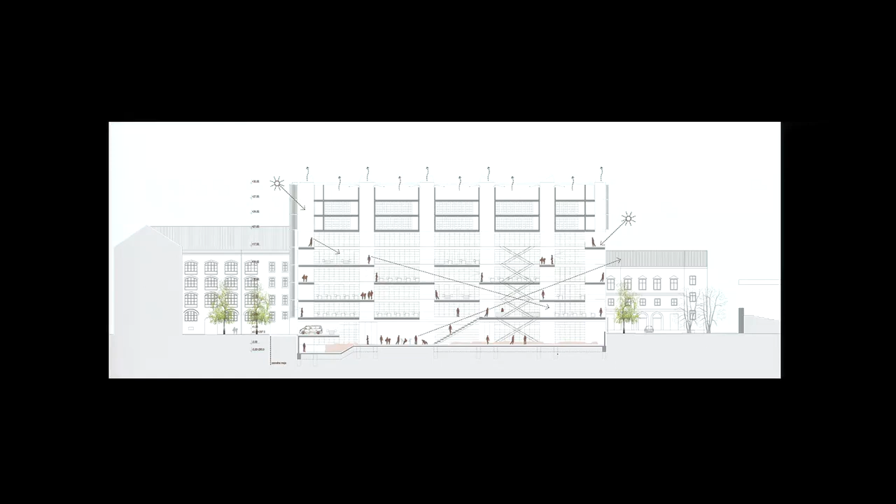And of course there are offices at some point, and the storages, because you can't go under the archaeology with the storages, millions and millions of books are on top of your head. So all of the storages are then also used, as you see on this section, to bring light back into this reading room. The reading room is now no longer one space, but it's in fact a series of platforms that somehow becomes a common ground or common space of the university, overlooking the old city of Ljubljana.

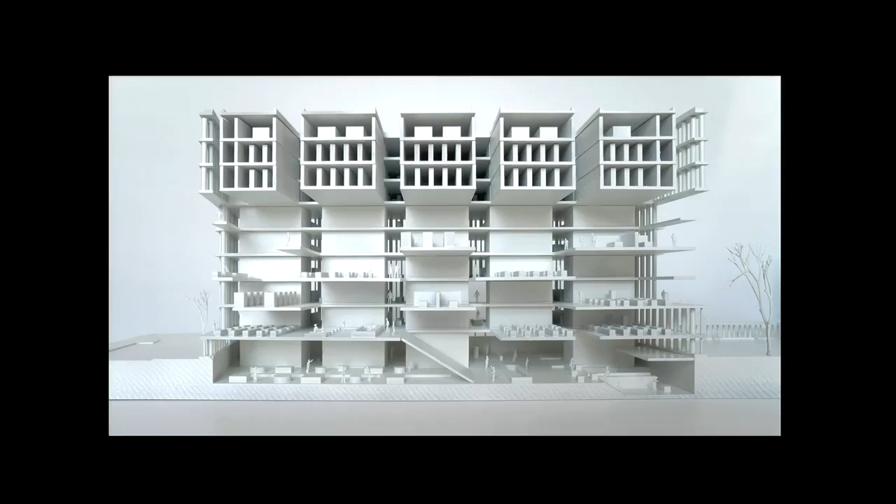This is where you see it in the model, how the light will penetrate through all the storage spaces and machine rooms and come down into this space underneath.

And this is our building. We made the construction, which is in fact working like a wall. It's a series of columns, very thick like this, much thicker than me, that is spaced very rhythmically, but that basically structurally works like a wall.

So why is this important? Because at points when you want more light inside the building, like this point, or this point, you can make the columns thinner because the wall is still going to function. So in a sense, it's a structural model that is very rigid, but at the same time completely free.

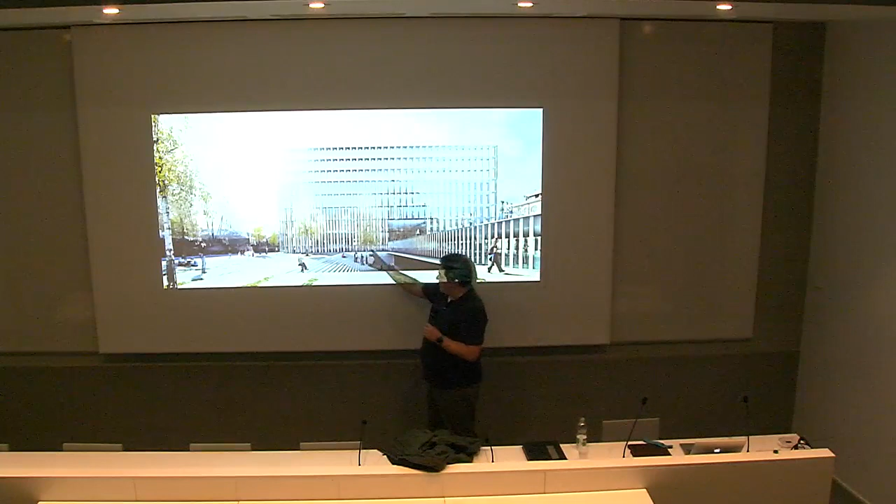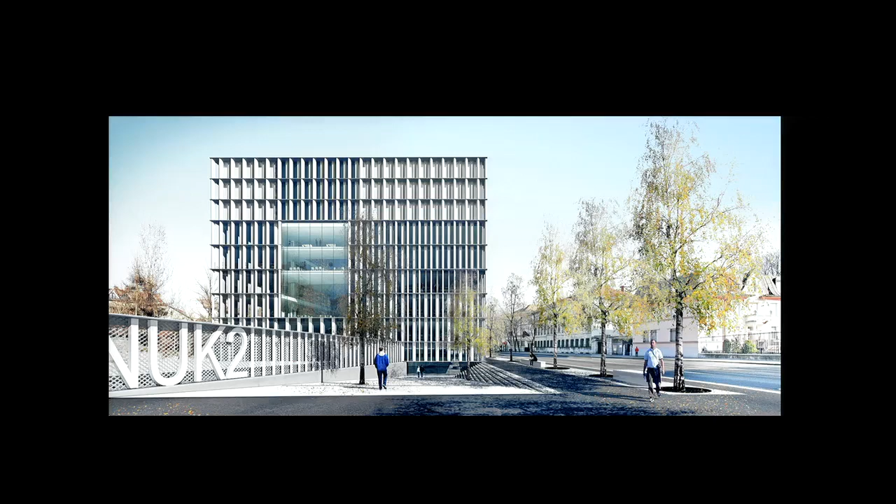Why do we also have columns? Because these columns, when you try to hit the archaeological ruin underneath, you can also skip it, because you can take the column out and the whole structure is still going to continue working like a wall on top of it. So in that sense, you can have a building which has the rigidity of a monument, but at the same time fragility of a kind of a breathing thing.

It looks very banal and almost postmodern in a way, but at the same time it's also completely almost like an amoeba, completely reacting to the surroundings or to the program.

So this would be, well, not really from my office is on the second floor, but in fact within this very homogeneous facade you are going to start noticing these subtle changes in the structure, which also indicate subtle changes in the program behind. These are the reading rooms, the special reading rooms for the maps, for the old maps, while the big reading room of course is defined.

This is a model for the competition which actually one Spanish girl in our office made herself.

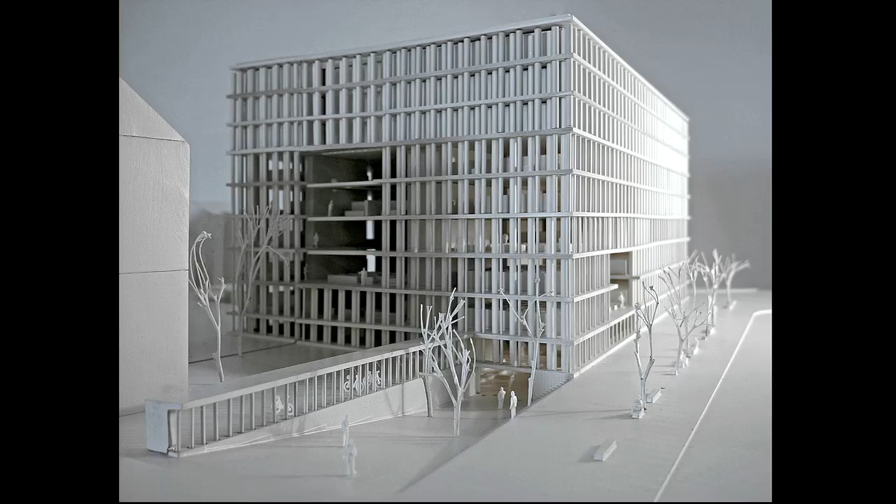So, and then of course, which I forgot to mention, but it's obvious, the ground floor of the library will never exist. It will always be the underground that is the history where the whole thing begins.

As in the end, I'm going to only show you one project which is not really ours, which is the project designed by 5 offices. Did you go to see this building?

We were asked to do a competition against 4 of our friends who we are always competing against, because we are all kind of offices that started at the same time and we always fight against each other, but we are also friends. None of us had any work, so we were asked by a group of artists to do a project for a small museum up in the mountains in Slovenia. And we said, okay, nobody has work, so we better do this project together.

And this project became somehow a testing ground. Is it possible to work with another office? Because it was not so much the idea of if you're going to survive, because you're not going to survive. We all lost money on the project, of course, but it was a testing ground, whether you can all of a sudden in the middle of your career start working with some other people on a totally equal level. So it was a good experience, but this is the middle of nowhere.

This is really, I don't know. I don't know these places. Like if you would say Les Arcs, you know? I mean, it's something that kind of God has said goodbye, or even the Pope. But it kind of exists, a lost place in the summer in the mountains.

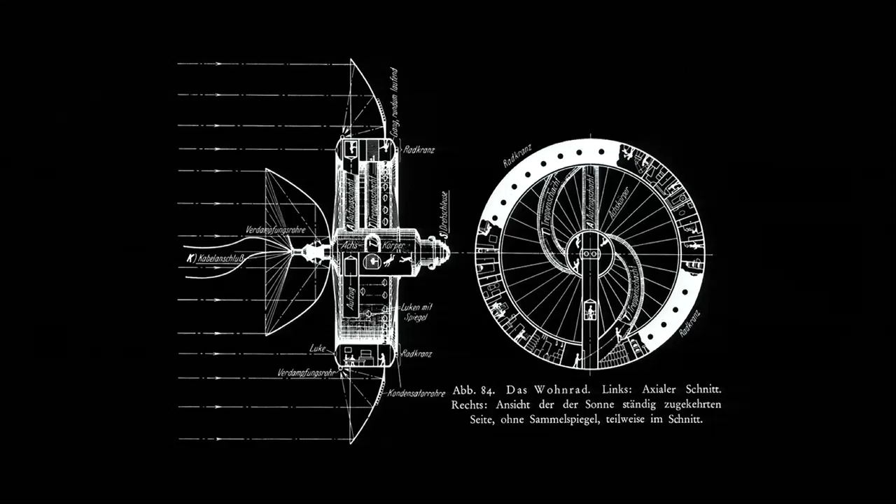Why? Because a guy who was born in this village, from 1892 to 1929, where he died at the age of 35, wrote a book which was a base for space exploration. So Wernher von Braun, when he was doing the American NASA program for space colonization, or all of the other people after him, were always using the basic postulates which were written by this guy in the end of the 19th, beginning of the 20th century. A weirdo from this village, who of course was living in Vienna, not in this village.

Basically this is a habitable wheel, no? So you see the beds and you see the showers and whatever.

So this guy was coming from this village, and this is why a group of crazy artists decided to make a museum for him. For them, the museum was not really about making a museum about this guy. There's nothing to do, it's just the location, but it's a museum which is more about - and I think this is a very good idea - what they call the culturalization of space.

Space, at the moment, we see only as a scientific category, no? It's something that we are conquering through progress of science. But space, according to these artists, not according to me, is also a space for expansion of our culture. We are not only scientists, and we are not only people aiming at conquering other worlds through science, but also through culture.

So this guy, one of these two artists, his ultimate goal is that he's going to basically - well, he says die, but die in space - so that his final act of his artistic activity is going to be that he gets shot into space, presumably without oxygen, of course. So we did a building which is in fact the interpretation of this idea of this guy.

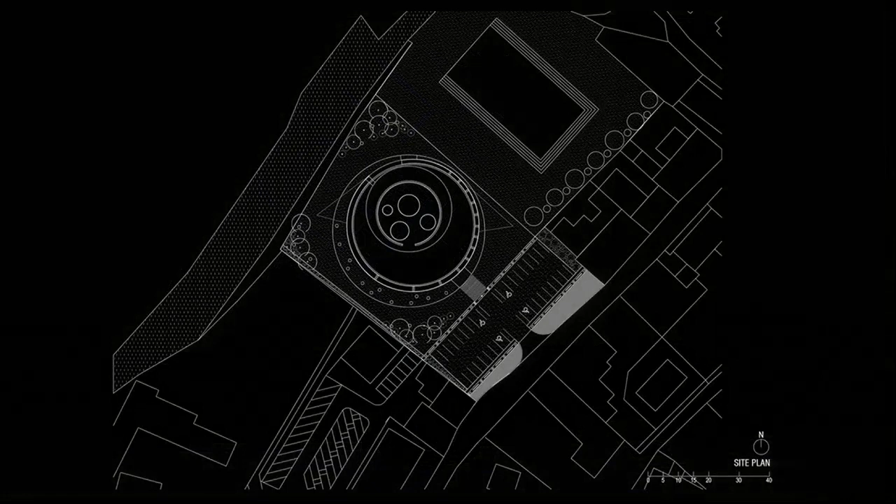We did it with 4 offices. Each of the offices participated equally. We are all more or less the same generation. We did a building which would somehow illustrate what this guy is trying to do.

We managed to convince the village people, 600 people, that they should demolish their cultural home. They had a small cultural hall. So we convinced them that they should demolish it, because they should put their cultural space inside this building, so that this should not be a museum - which is very stupid to have in this place - but to include all of their local programs into this building.

We of course tried to create a building which - this is the picture - communicates with the other 2 big poles, the Protestant and the Catholic Church, and this is the third, the little Church of Science and Culture.

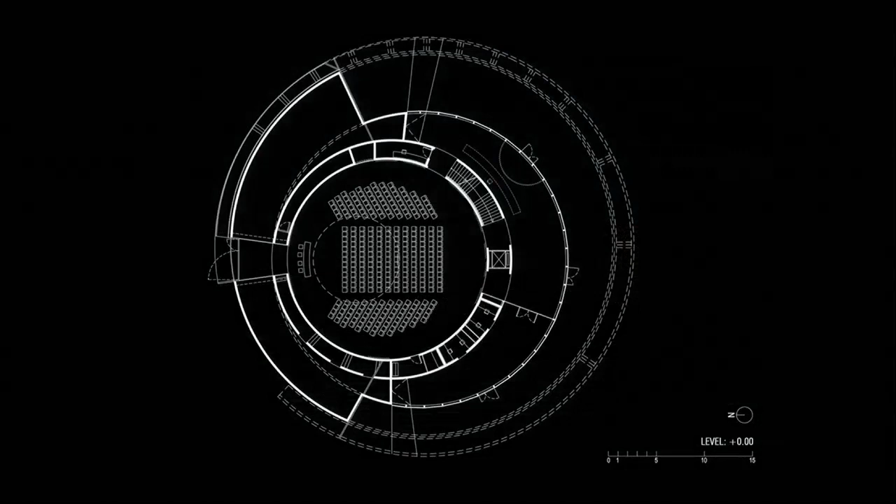And we tried to create a building which would physically create the conditions of this guy's research. Basically, the building consists of the big hall, which is used by the entire village, a library, space for the retired people, and then the museum starts only in the back.

The museum is this kind of big wheel that comes up and comes down. So it's basically a continuously looping surface. We tried to create a building where every space would deny gravity, so nothing is flat in this building - the whole building is in fact curving one way or the other, and whenever you walk through it you basically feel unsafe, like you're not really on this earth.

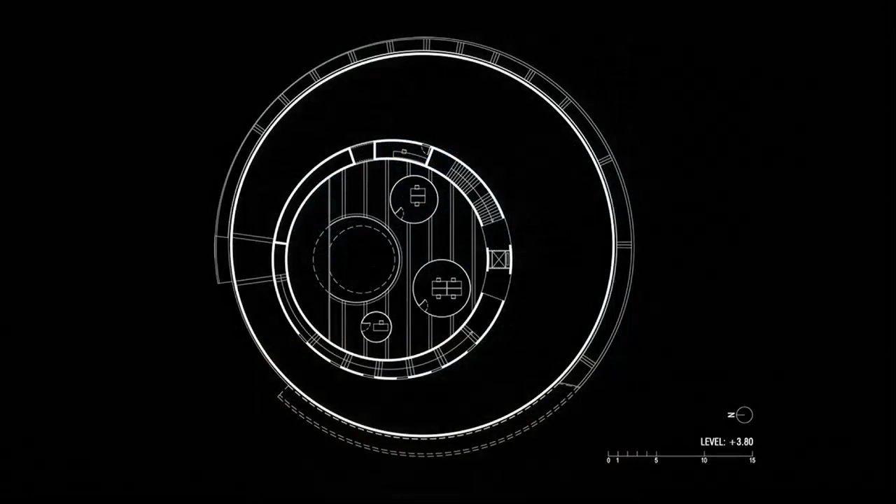The museum space wraps around; on top of the museum you enter into this space, which is a big staircase that brings you to the roof, and 3 artist residency programs. This is the library of the museum. And then you would come out on the roof and use the surrounding ring to come down to the ground floor. So this is the exhibition space.

It's an extremely rough building. We had a very small budget to build it. So basically the material, the concrete as it comes out of the casting, is the interior of the building. And I think it works very well.

It's impossible to draw sections of this building. We had an incredibly good structural engineer who was able to calculate this enormous amount of curving surfaces, which you don't even notice as an architect when you draw them, but only if you draw them in 3D do you realize that the things are not meeting together.

So these are the residency programs. These are the only flat spaces inside the entire building - the 3 small offices where the artists can actually work on their own projects.

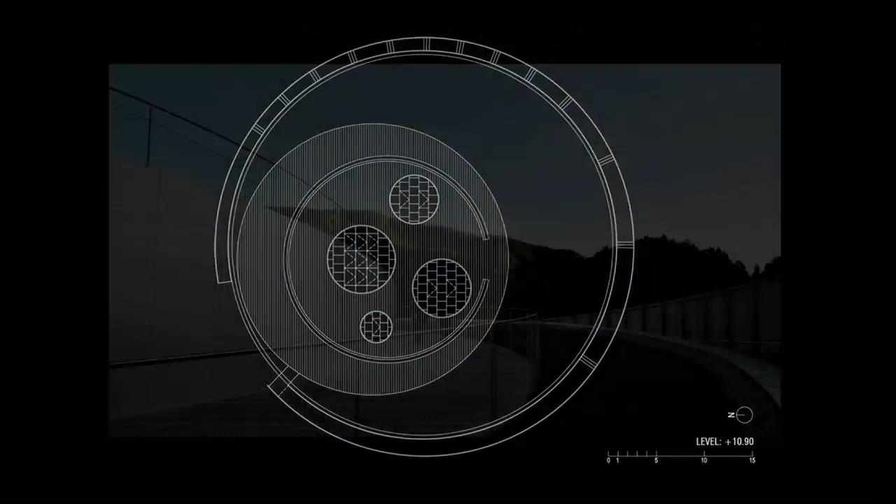That takes you to the roof and around, and then back through here into the outside, into the landscape. So the building is completely integrated into the landscape. You can climb into the building and climb down without actually entering the building.

So finally we did a project that we didn't do ourselves. We all felt very good about it. We also did a project that was somehow very much inspired by the work of these artists, so that was really not us so much. And we also did a project that was trying to put forward some ideas that the community - you know, the old ladies that do the knitting - also sit in this building, among all the spacesuits of the NASA astronauts.

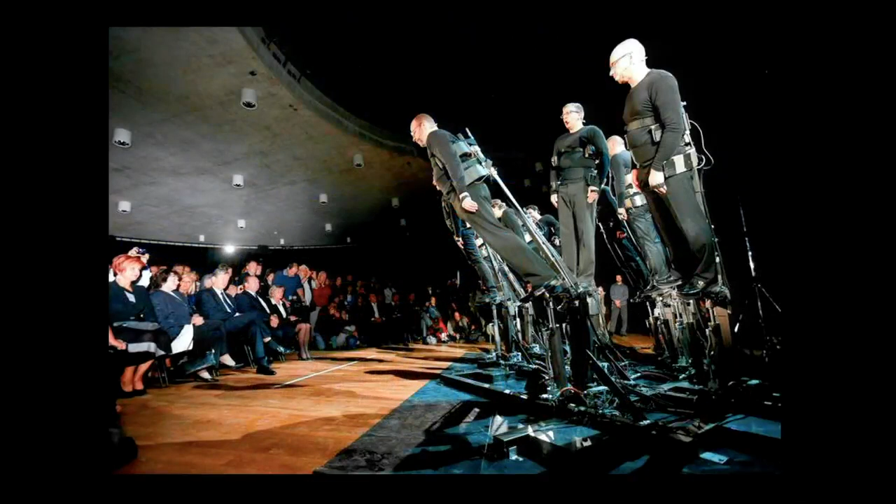This building works with this kind of artists. This is a Swiss choir, a group of Swiss men who sing. They produce continuously one voice, one sound, but the machines they stand on tilt them so the sound changes. So you create music by tilting people through space.

By the way, this is the president of Slovenia, the guy sitting over there, also at this opening. You see how they work very well with the building, because nothing is flat in the building, and they're never flat, because this is what produces this sound.

So in a sense, this is maybe a final image of the presentation. I would like to thank you for your patience, and if you have any questions, you can ask me now or later. Thanks.